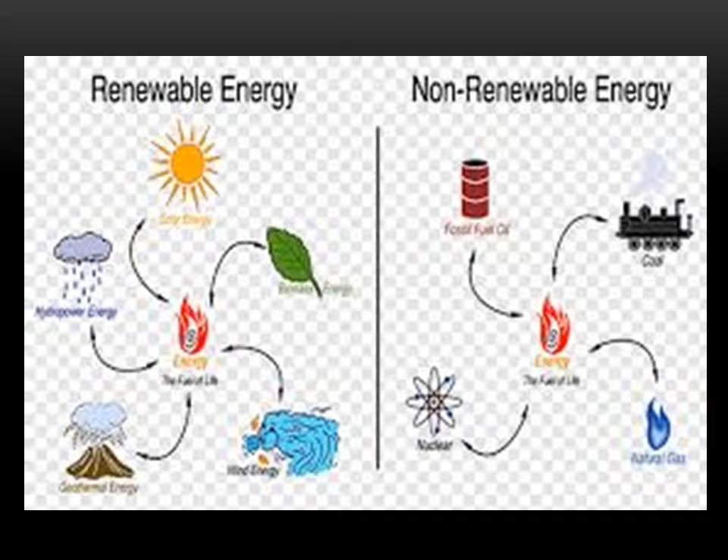So here we will start with non-renewable energy resources. On page number 133, the first topic is coal. Coal is a very old fossil fuel. It is formed by the decomposition of natural vegetation. The better types of coal have taken several hundred million years to form, from the decomposition of natural vegetation like equatorial swamp forest.

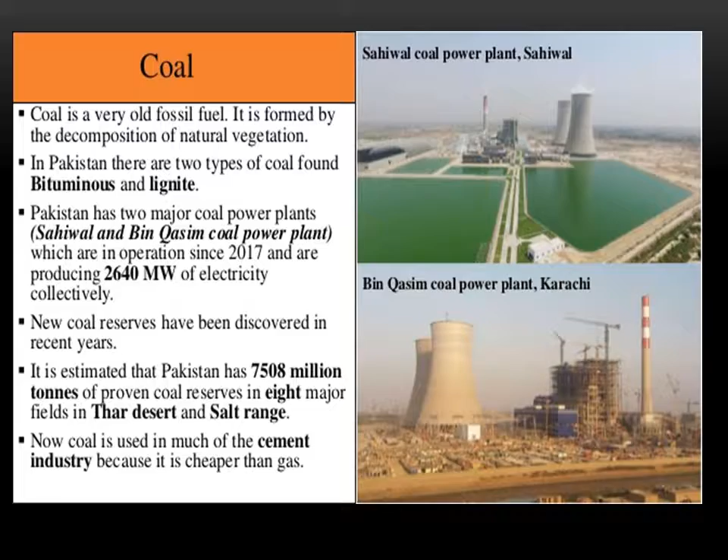This is basically a hard rock which can be burned as a solid fossil fuel. It is mostly carbon but also contains hydrogen, sulfur, oxygen, and nitrogen. It is sedimentary rock formed from peat by the pressure of rocks laid down later on top. There are different types of coal, ranging from anthracite to peat, which have different qualities. Like anthracite is considered the best quality coal, and peat is considered the lowest quality. In Pakistan, bituminous to lignite types are found in limited quantity.

Peat is the youngest form of coal. This is lowest grade, low quality fuel and organic material for gardeners. This is exclusively vegetative matter and represents the initial stage of coal formation. Its carbon content is very low.

Lignite is a lower quality coal with a high moisture and ash content. It has a low heating value and it is 150 million years old. It contains 50% carbon content.

Then is bituminous. It is like 300 million years old and it has 50 to 80% carbon. There are two subtypes of bituminous coal: steam coal and coking coal. This is a superior black hard coal found in highly compressed seams. Burns readily with great heat, its carbon content is less than the anthracite. The coking coal is burned to produce coke, a hard gray porous material. It is used in blast furnaces for the extraction of iron from iron ore.

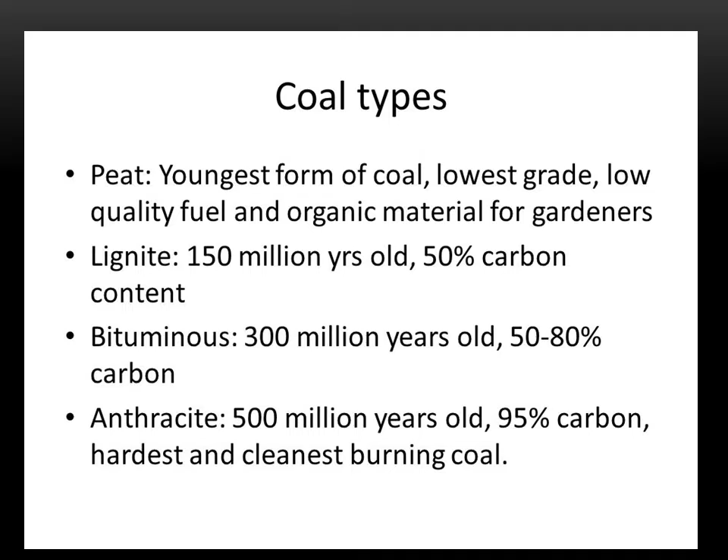Why does Pakistan have low quality coal? Pakistan has low quality coal, that is lignite, because Pakistan is a poor country which doesn't have good machinery to dig out the best coal which is found very deep underground. So Pakistan mainly uses lignite which is found near the surface and is easier to mine. This is a natural fact which cannot be changed, but this type of coal is also very useful. If it is developed, this coal is mainly used to produce electrical energy.

Why is lignite considered a low quality coal? It is a lower quality coal with a high moisture and ash content.

In your book, on page number 133, there are two figures, figure 8.2 and figure 8.3, which better explain the types of coal. Now, the next topic is the transportation of coal from the coal mine to the end user.

After the extraction of coal from the coal face, the exposed surface of coal in a mine, it is loaded on trolleys which run on a track as shown in figure 8.9 on page number 136, which leads from the coal mine to the outside surface.

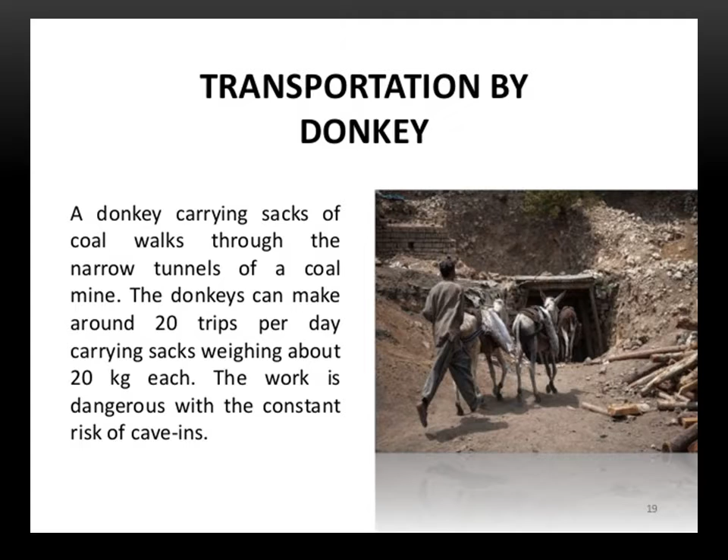In some small coal mines, donkeys are used as underground transport. A donkey carrying sacks of coal walks through the narrow tunnels of a coal mine. The donkeys can make around 20 trips per day, carrying sacks weighing about 20 kilograms each. The work is dangerous with the constant risk of cave-ins. Do you know what cave-ins are? It's a collapse of the roof of an underground structure - an instance of yielding or submitting under pressure.

On page number 134, you can see that once the coal comes out of the mine, the qualities of coal are separated and sold to the middleman. Do you know who the middleman is? A person who buys from the producers and sells to retailers, who further load it into trucks and supply it to the brick kilns and cement factories. Do you know what brick kilns are? A kiln is, we can say, an oven type furnace in which bricks are baked or burned.

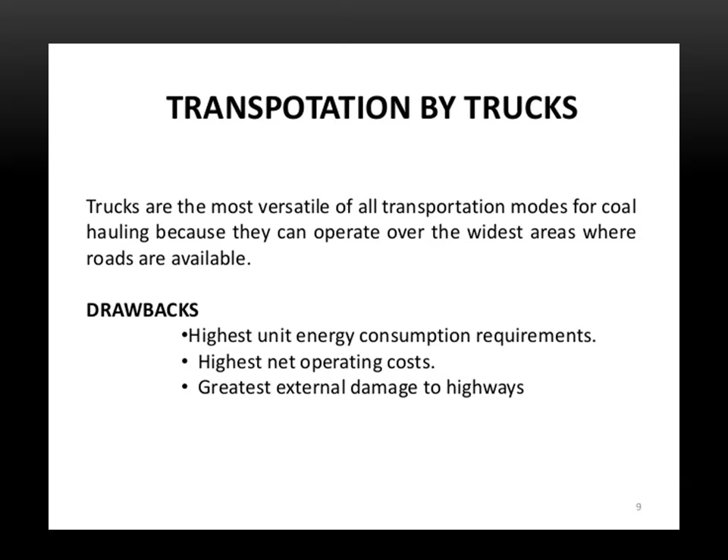There are some drawbacks of using trucks for coal transportation. It has the highest unit energy consumption requirement, the highest net operating cost, and causes the greatest external damage to the highways.

When coal is supplied to thermal power stations, rail transport is also used if it is economically feasible, because this is one operator that can transport bigger loads.

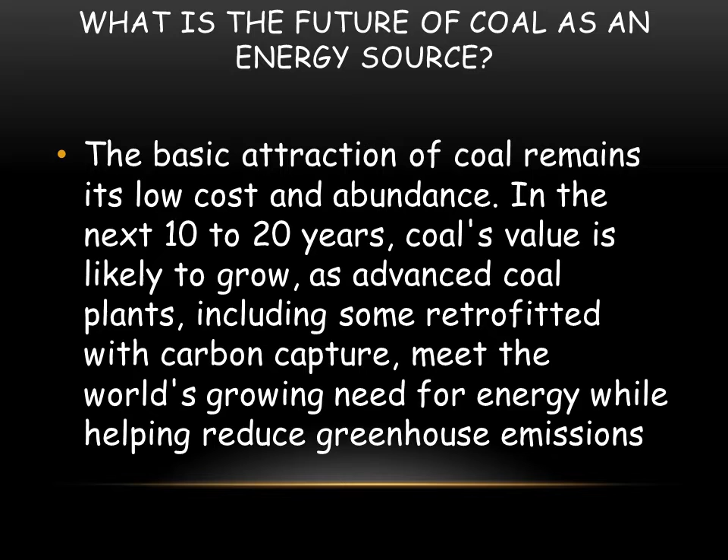The first reason is that new reserves of coal have been discovered in recent years. It is estimated that Pakistan has 7,508 million tons of proven coal reserves in 8 major fields in Lower Sindh, the Thar Desert, and the Salt Range. According to one study, the coal reserves in the country are many times greater than the total reserves of natural gas and oil.

The second reason is the rising prices of oil, so coal can be used as an alternate source of fuel. In view of the uncertainty surrounding the price of oil and the tremendous amount of foreign exchange involved in the import of oil, the authorities have considered the option of using indigenous coal as an alternate source of fuel. Now, coal is used in much of the cement industry because it is even cheaper than natural gas.

Indigenous coal means the coal that is native to some area, like local coal. So it is very cheap to use local coal as an alternate source of fuel.

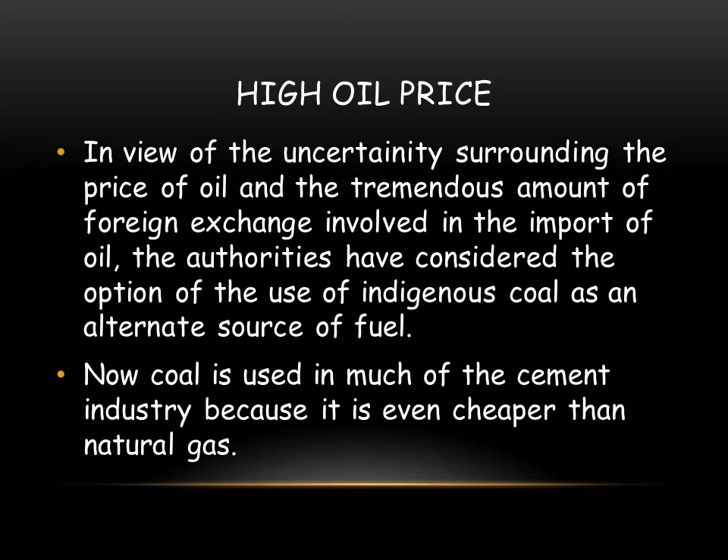There are also some environmental losses with coal mining. The environmental challenges from coal mining include coal mine accidents, land subsidence, damage to the water environment, mining waste disposal, and air pollution. These are either environmental pollution or landscape change. It is not advisable to build coal-fired power plants close to the River Indus.

Coal-fired power plants are the largest source of fly ash and mercury pollution. Do you know what mercury is? Mercury is a toxic heavy metal which cycles through the atmosphere, water and soil. This mercury pollution falls into nearby rivers where it builds up in fish. People who routinely eat mercury polluted fish can suffer brain damage and nervous system disorders.

Particularly in young children, fly ash causes severe problems like lowered crop yield, respiratory disorders in humans and livestock, and contamination of groundwater with toxic salts and metallic contents.

Not only can coal mining create problems, coal transportation can also create a big problem for us. The greatest single environmental problem from coal transportation is coal dust entrainment. Adding water to coal can significantly reduce dust entrainment. The critical dusting moisture content varies with the type of coal.

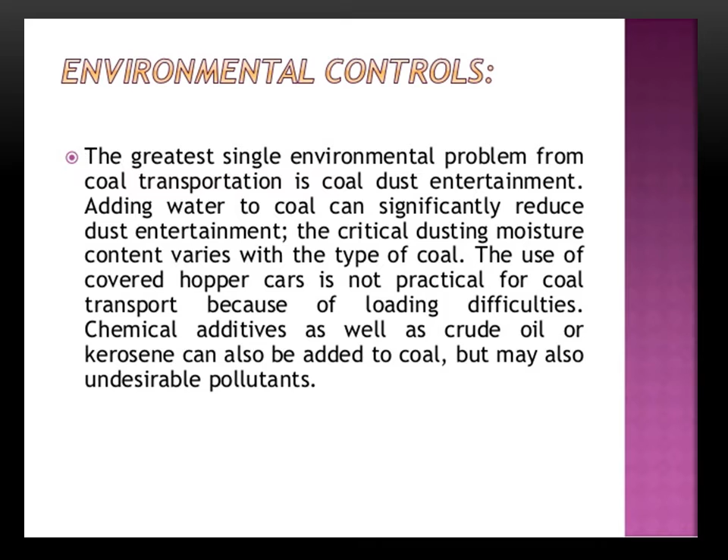The use of covered hopper cars is not practical for coal transport because of loading difficulties. Chemical additives, as well as crude oil or kerosene, can also be added to coal, but these may also introduce undesirable pollutants.

To reduce the risk of transportation, there is an easy way: gasification of coal. Through gasification, fuel companies convert coal into easily transportable coal gas or liquid fuels. The coal is heated in the presence of steam and oxygen to produce coal gas, which is a mixture of carbon monoxide, hydrogen, and methane.

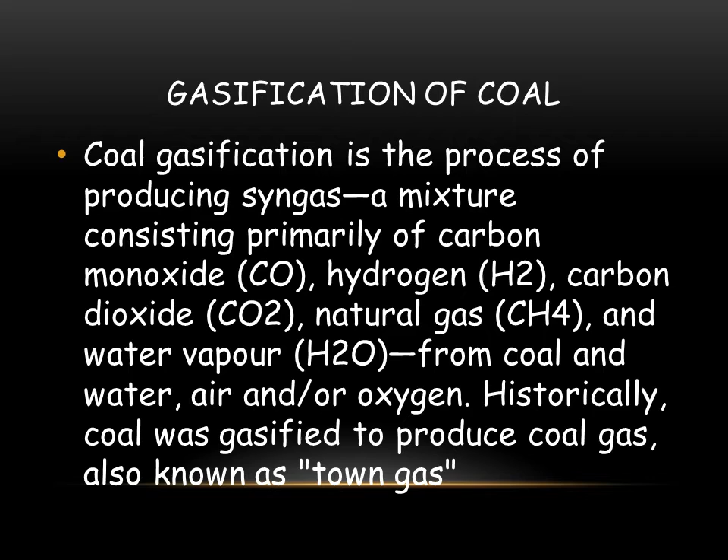It is used directly as fuel or refined into cleaner burning gas to make it environmentally friendly. According to policy making sources, the focus of the coal policy is on power generation through coal and gasification of coal. The government's policy focuses on aggressive coal mining and modern usage of coal using the latest technologies, including those developed over the years by the Americans, Europeans, and Chinese.

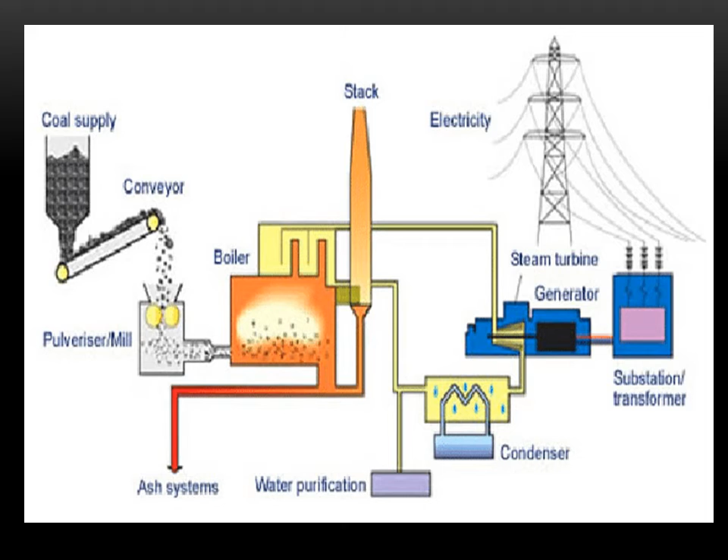How is coal converted into electricity? Let me tell you. Steam coal, also known as thermal coal, is used in power stations to generate electricity. The coal is first ground to a fine powder, which increases the surface area and allows it to burn more quickly. In this pulverized coal combustion system, the powdered coal is blown into the combustion chamber of a boiler where it is burned at high temperature. The hot gases and heat energy produced convert water in tubes lining the boiler into steam.

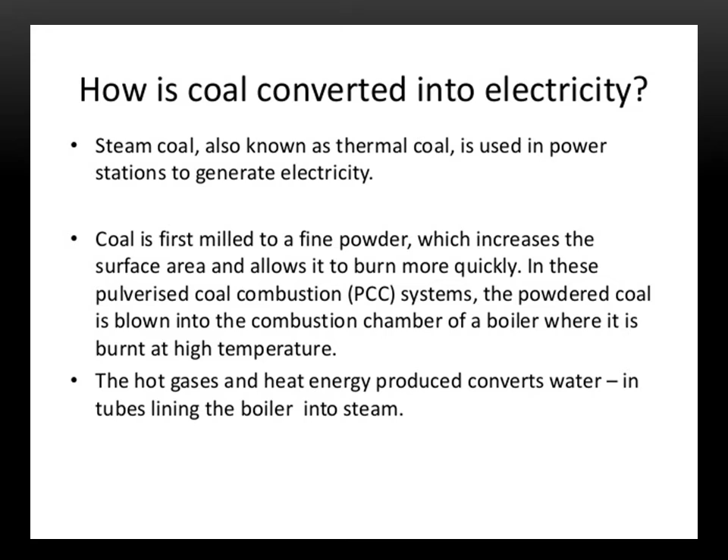The high-pressure steam is passed into a turbine containing thousands of propeller-like blades. A propeller is like a mechanical device for propelling a boat or aircraft, consisting of a revolving shaft with two or more broad-angled blades attached to it. You must have seen these type of blades - like a small fan located in the front area of aircrafts. So that is a propeller, and this is thousands of propeller-like blades.

The steam pushes these blades, causing the turbine shaft to rotate at high speed. A generator is mounted at one end of the turbine shaft and consists of carefully wound wire coils. Electricity is generated when these are rapidly rotated in a strong magnetic field. After passing through the turbine, the steam is condensed and returned to the boiler to be heated once again.

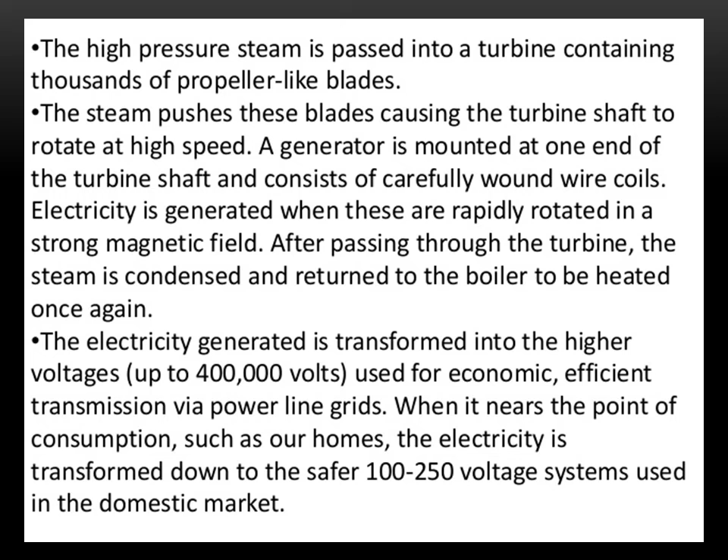The electricity generated is transformed to higher voltage, up to 400,000 volts, used for economic and efficient transmission via power line grids. When it nears the points of consumption, such as our homes, the electricity is transformed down to safer voltage systems, like 100 to 250 volts, used in the domestic market.

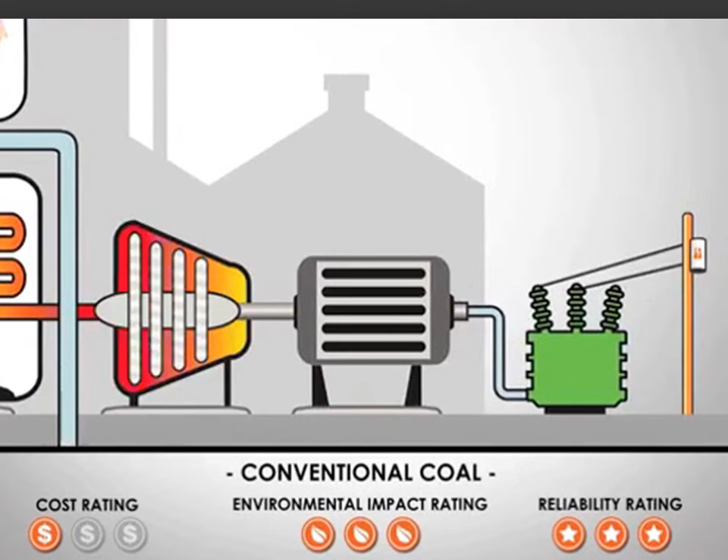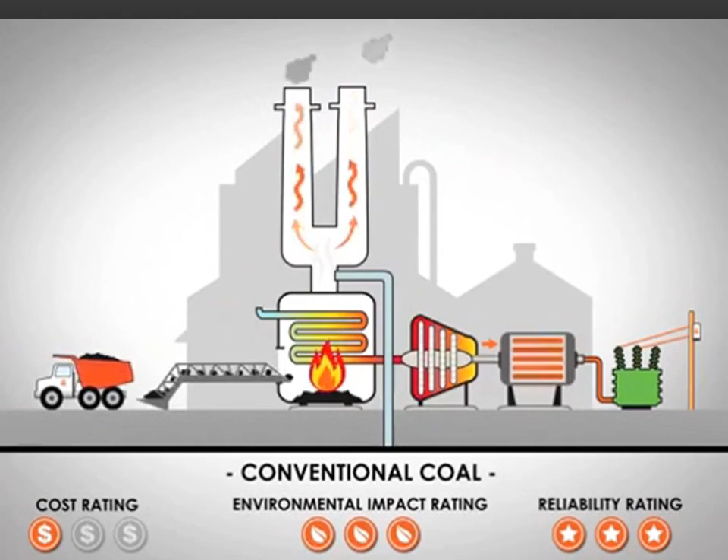In a thermal power station, like the Boundary Dam power station near Estevan, coal is burned in a boiler to convert water to steam. The steam goes into a turbine which turns a shaft. This shaft is connected to a generator that makes power as it turns. A condenser converts the spent steam from the turbine back to water that is reused in the boiler.

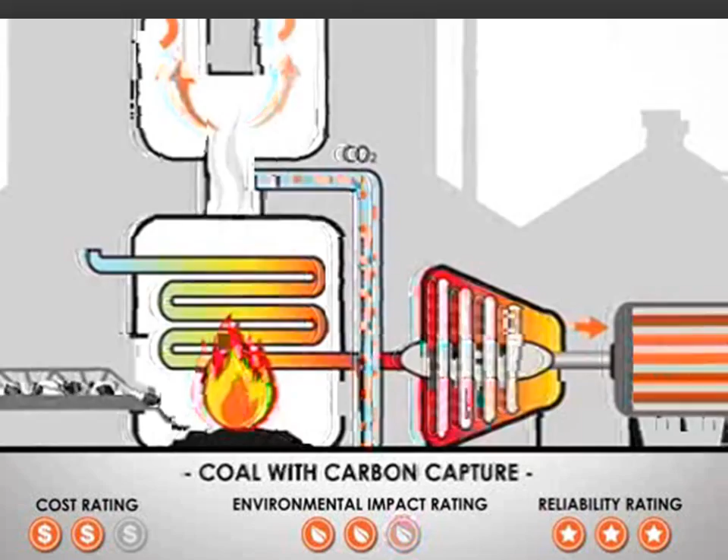Sask Power is among the first in the world to use carbon capture and storage. We capture the carbon dioxide coming from one of our coal units, compress it, and send it deep underground permanently to reduce our impact on global climate change.

So let me revise again. We started with energy, and I told you there are two types: renewable and non-renewable energy resources. Then we started with non-renewable resources, and our first topic was coal. I told you about the types of coal: peat, lignite, bituminous, and in Pakistan we have anthracite as the superior quality, but in Pakistan we mainly have bituminous and lignite. Lignite is low quality coal because it has low carbon content, so it produces more ash and low heat. Then I told you about the locations where it is found, like Lower Sindh, Quetta Coal Provinces, and also Potwar and Salt Range.

Then modes of transportation: donkey carts, railways, trucks - we can use these for transportation of coal. Then why we use these things: basically coal is used for power generation, domestic heating and cooking, industries, iron and steel to make coke, brick kilns, ceramic industries, locomotive engines, and gasification of coal.